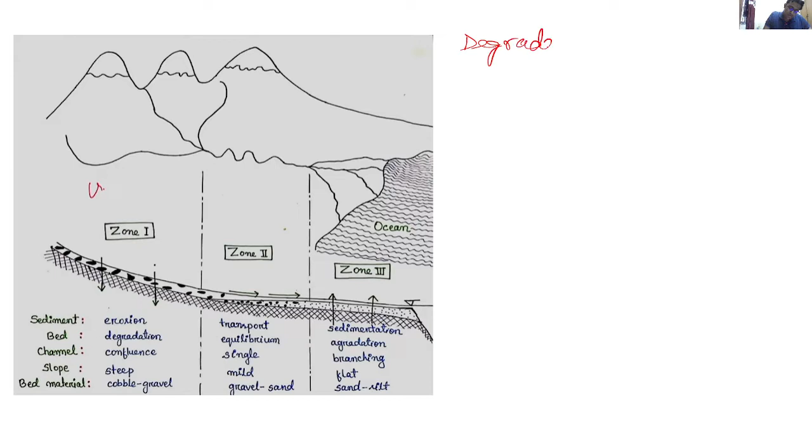One thing very interesting in this part is the geological property of the bed: what is degradation and what is aggradation, and what's the difference between them? I'd like to give a brief overview so I can explain why a river usually forms, and what kind of properties are required for a river to form and flow. These two are basically geological processes, meaning they usually take a lot of time to happen, ranging from thousands to millions of years, though the time frame depends on different rivers around the world.

So I will give a brief difference between aggradation and degradation. After this slide, I will explain why these processes are so important for the formation of a river. Mostly aggradation, as already discussed by Professor Datta in his lecture, relates to increasing the bed level of the river, whereas degradation results in decreasing the bed level.

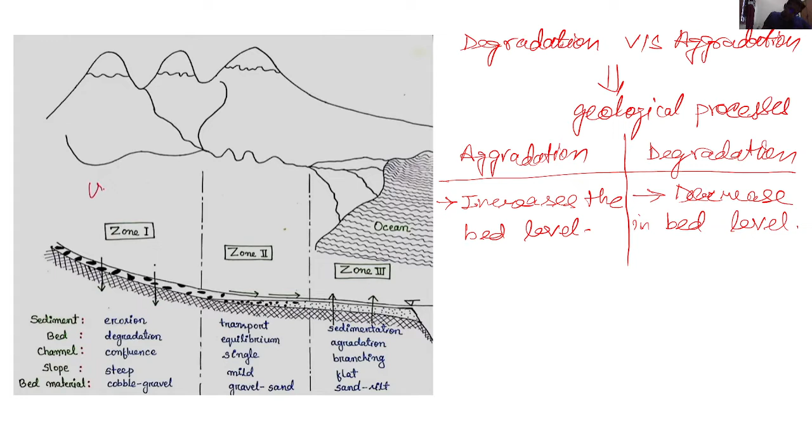Aggradation happens in sediment-rich rivers, whereas degradation happens mostly in sediment-starved rivers.

So aggradation is associated with deposition of sediments, whereas degradation mostly is associated with erosion of the sediments or the erosion of the river bed.

And last but not the least, aggradation is mostly associated with a decrease in kinetic energy, whereas degradation is associated with an increase in kinetic energy. I will take just one more slide to explain it.

So a few things are to be noticed. What is the role of kinetic energy? How does kinetic energy play a part in aggradation or degradation? Basically, as rivers run out of kinetic energy, whenever the stream velocity decreases, they lead to a deposition of sediments.

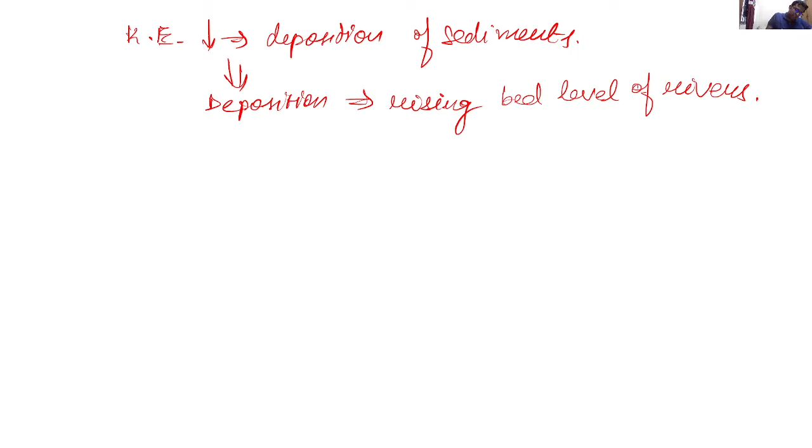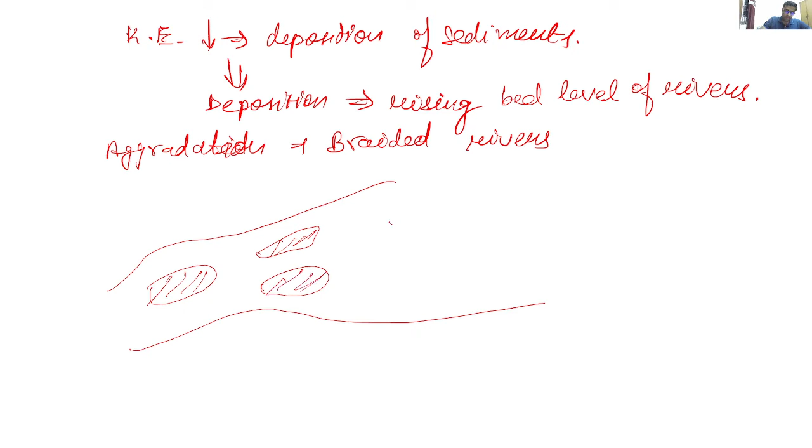So this aggradation is more commonly seen in braided rivers. Braided rivers you might have seen in most of the Indian rivers. When they reach towards the oceans, the braiding increases. The rivers may be very wide, however there may be several sandbars in between.

These are what we call braids, or the braiding of a river. There may be a number of sandbars in rivers as they reach the ocean. The Jamuna River of Bangladesh is a very common example of it.

So in braided rivers, you will see that the stream velocity drastically decreases, and that is why the deposition of sediments also increases, leading to the braided rivers. These are also known as sandbars or braidings—there are several names for it. So it creates a braided appearance for the river.

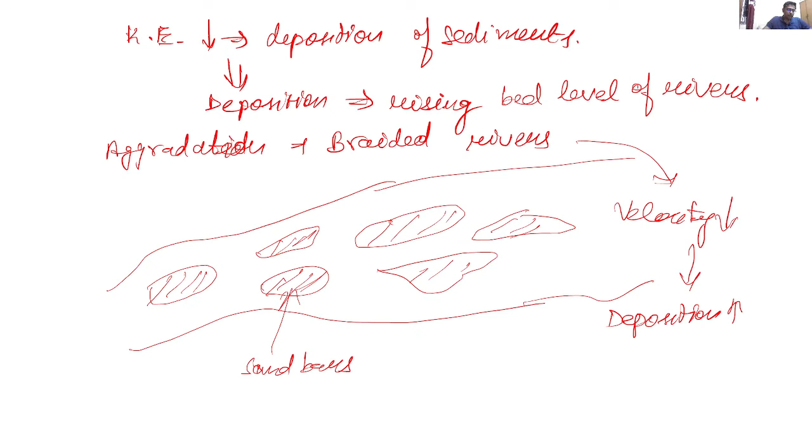There is another reason why braided rivers may be formed: riverine plants, or the plants which are near the fluvial surface, the stream surface. What they do is take root in the river, creating an area resistant to erosion where sediments can build up, creating a bar.

So as the plants or vegetation increase near the banks of the river, their roots may penetrate deep into the banks of the river. This causes more resistance to the flow of the river, resulting in more sediment deposition and a higher number of bars in that area.

On the other hand, the process of degradation is a completely different process. We'll take another slide to explain that.

So degradation happens when the kinetic energy is high, and kinetic energy can be high because of several factors. Some may be due to higher glacier melt in rivers fed by glacier melt, or there may be steepening of the river slope by tectonic uplift.

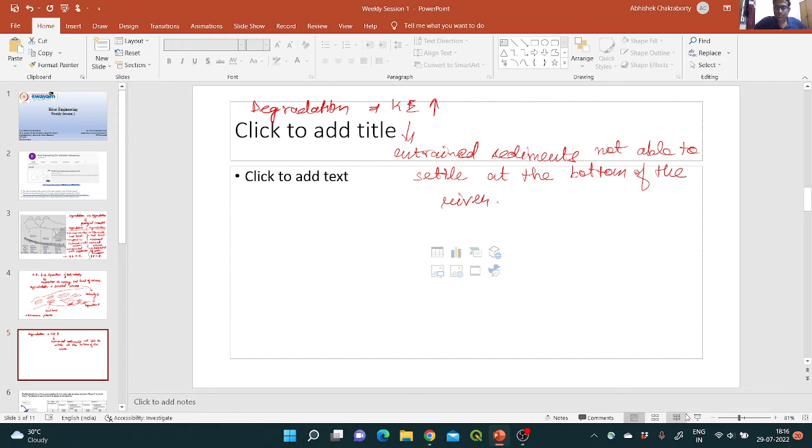There is one doubt there. You all must be having a very simple doubt: why do we need this course of river engineering? Why don't we just merge this course with fluid mechanics, just like the case of open channel hydraulics? Why do we need a separate course, separate study material for this? What's so different about it? We're just doing the same thing as fluid mechanics, isn't it? What do you think about that? Any idea why we need a separate course on river engineering? Please feel free to share your thoughts.

Yes, please proceed. Any idea why do we need a course on river engineering?

Yeah, the riverine hydrology is different when compared to fluid mechanics actually. But can't it be defined by the water transport itself?

No, my view actually is whenever we are designing something over that river, we should know in detail about the hydrological part of that river. That is a very correct view. I will just add that a very different process of sediment transport also occurs in rivers, apart from the water transport. Of course, water transport is also a very prominent feature of river courses, but sediment transport also occurs, and that is why river engineering is such a distinct course.

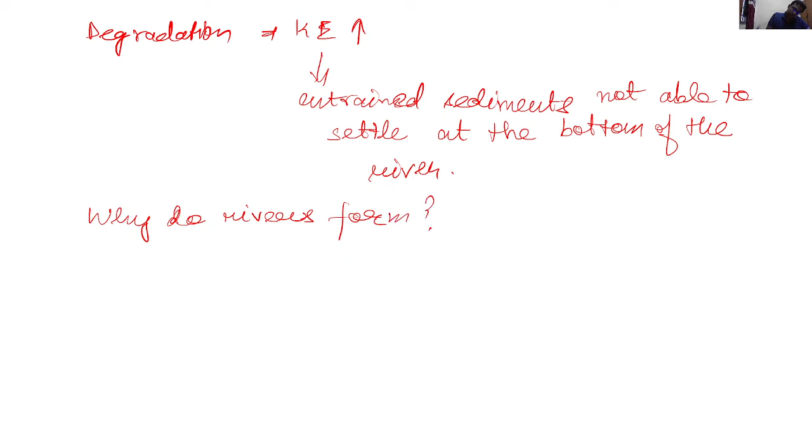Okay, I will explain it using some mathematical formulations now. First of all, why do rivers form? This is a question which may have come in the mind of many people. A very common question. So in terms of rivers, I'm mostly talking about alluvial rivers in this case.

Alluvial rivers are the ones in which the bed and the banks are made up of mobile sediments and soil. So sediments are mostly present in alluvial rivers, and in most of our country the rivers are mostly alluvial in nature, mainly the North Indian alluvial plains. So the major rivers of India are alluvial, present in alluvial plains, defined by a mass transport of sediment in their basins.

Three of the most important rivers which feed the stomachs of billions of people in India happen to be the Indus, Ganga, and Brahmaputra. All of them are actually in the alluvial plains itself. So it becomes very important to know why such rivers actually form, and which is the more dominant process governing the formation of such rivers: is it aggradation or degradation?

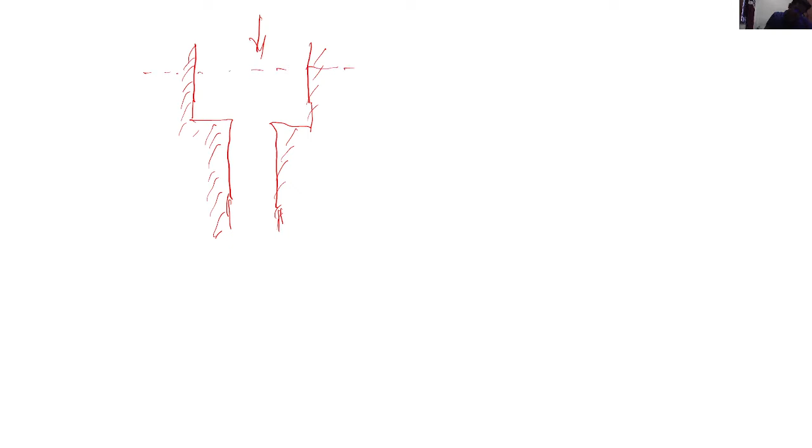So I will take just another slide to start this mathematical formulation. Let us take an example of a confluencing river, meaning the width of the river decreases. Let us assume this is the top width, the top view of a river. It is flowing like this, and there are two sections to the river: Section 1 and the converging Section 2.

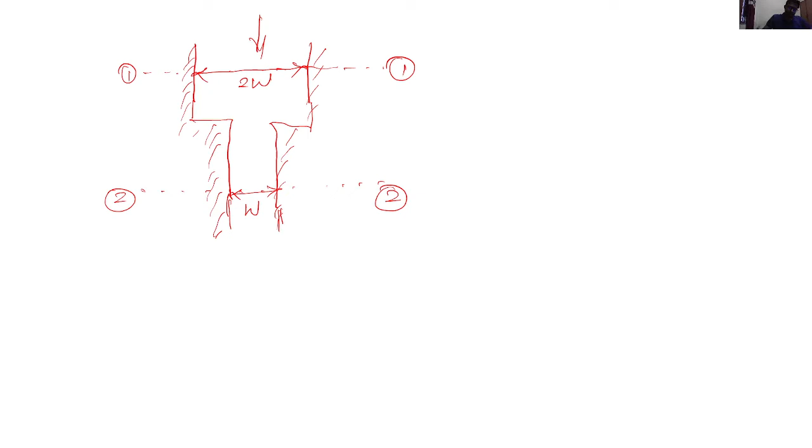Let us assume that in Section 1 the width of the river channel is 2W, and in Section 2 the width of the river channel is W. We are just assuming this to explain why rivers form and which process governs the formation of rivers among aggradation and degradation. I will explain it using this example of a river which converges to half of its width as we move further along it.

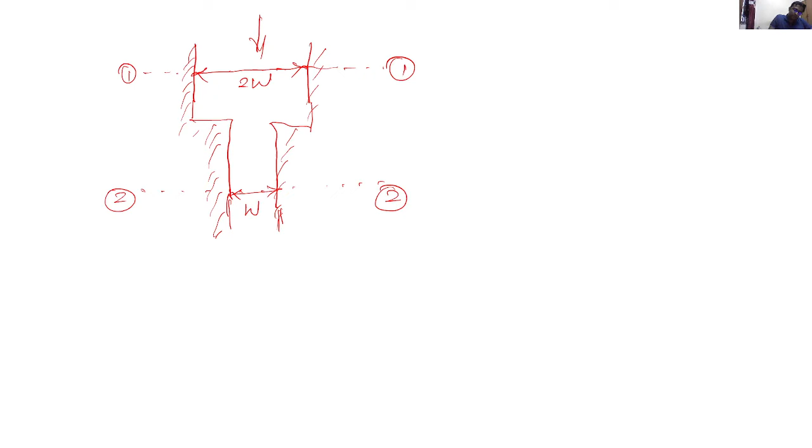So there can be two different components of a river: one is the water component, the other is the sediment component. Both these components are very essential for river hydraulics, and that is why we need to be concerned about both of them. The water component, from the continuity equation, gives us that the discharge Q1 at reach 1 will be equal to the discharge Q2 at reach 2. This is nothing but a fundamental of continuity of mass conservation, so Q1 will be equal to Q2.

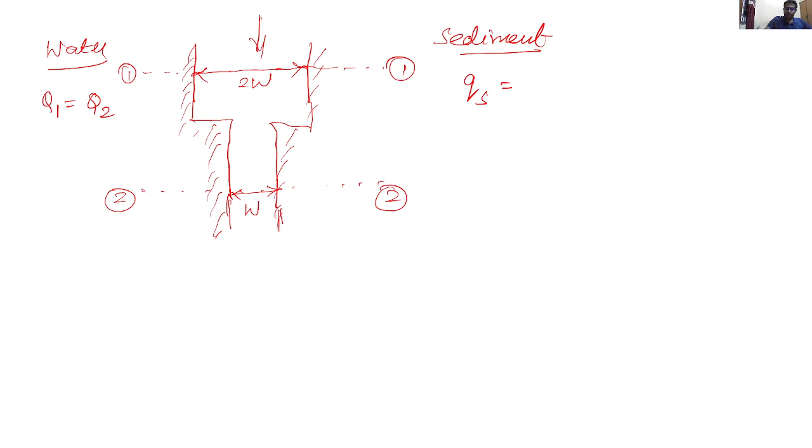And for sediments, we know that sediment discharge may be defined as a function of the stream flow discharge, like A times q to the power b, where small q is nothing but the unit discharge.

So unit discharge is nothing but Q by W, that is the total discharge under the unit width, and qs will be the unit sediment discharge. As I told you, there are two separate processes which govern the flow of rivers. One is the flow of sediments and the other one is the flow of water. So we need to be concerned about both of them. And let us just assume that C is the sediment concentration.

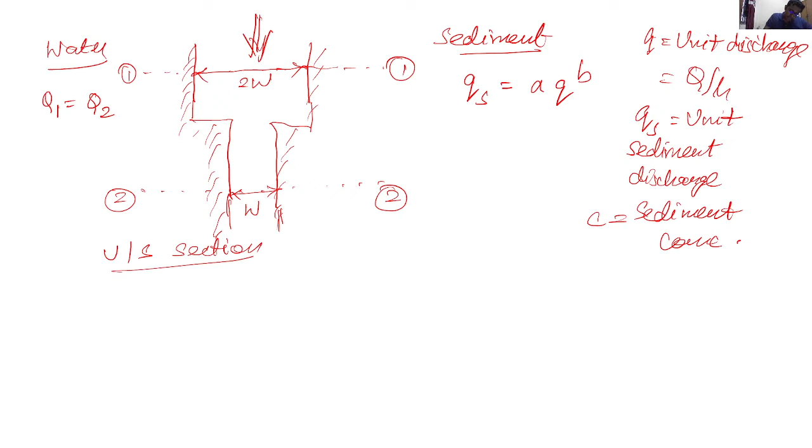So for the upstream section, as the river is moving from the top of the page to the bottom of the page, we can take the upstream section as 1 1. For the upstream section, we can write the total sediment load at 1 1 as equal to the sediment unit discharge, that is QS1 at 1. This subscript determines that it is for reach 1 1, multiplied by the total width of that reach. So the width is 2W for this case.

And as QS is equal to A times Q to the power B, that is, we are trying to write it in terms of water unit discharge, we can write it like this: A times Q1 to the power B times 2W. And let us suppose Q1 is equal to Q. Let us just assume it for the moment. So we can write this expression as 2W A Q to the power B. So this will be the total sediment load at 1 1.

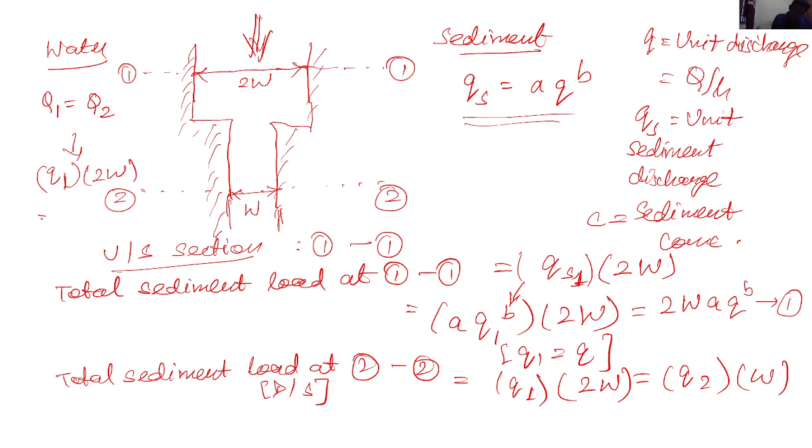Let us again take the total sediment load at 2 2. So that is the downstream section. So this would be again Q1 times 2W or Q2 times W, because we can write Q1 times the width 2W equal to Q2 times the width there, W. So Q1 times 2 is equal to Q2, that is the relation we will find from here. Q2 is equal to 2 times Q1.

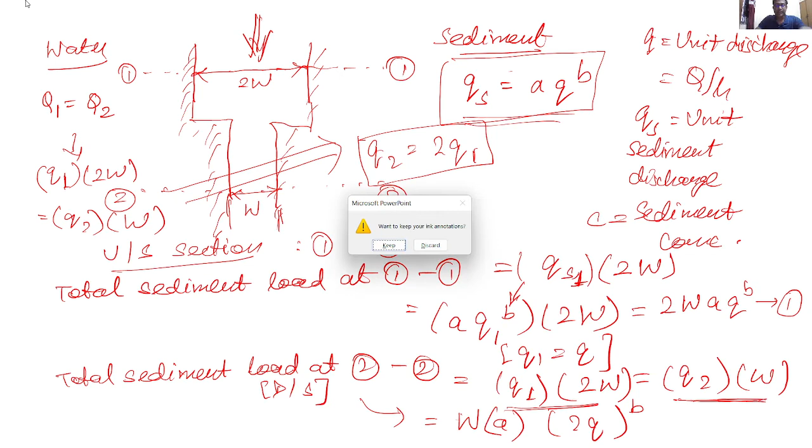So the sediment load at 2 2 will be Q2 times the width there, that is W, or Q1 times the width 2W. So both are same. This can also be written, now in terms of water discharge, as width times the coefficient A times 2Q to the power B, because we took Q1 equal to Q. We'll take another slide to finish this formulation, and I will give a very interesting result out of it.

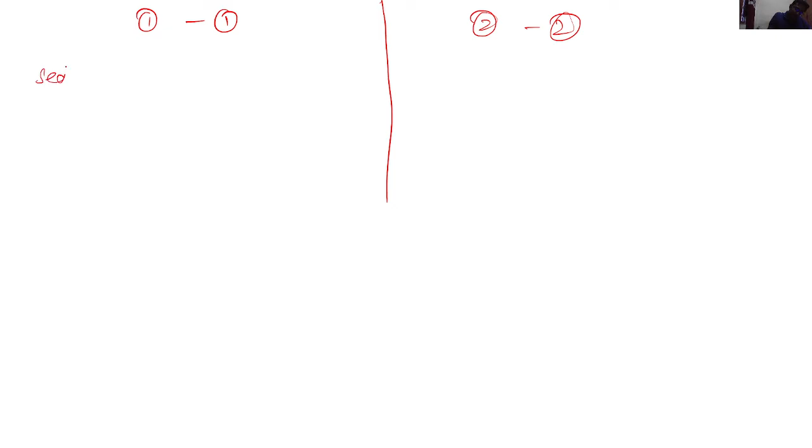So we got finally that at 1 1 and at 2 2 the sediment loads are different. The total sediment load at 1 1 is 2WA times Q to the power B, where W is the width at that position, and at reach 2 2, it would be WA times 2Q to the power B. So we see that these two sediment loads are not equal.

So any idea which quantity would be more among these two? 2WA times Q to the power B or WA times 2Q to the power B. It will depend on the magnitude of B, right? Whatever is the coefficient B value, that will determine which of the left hand side and the right hand side is more. So we can partition the values of B into two different components: if B is less than 1 and if B is greater than 1.

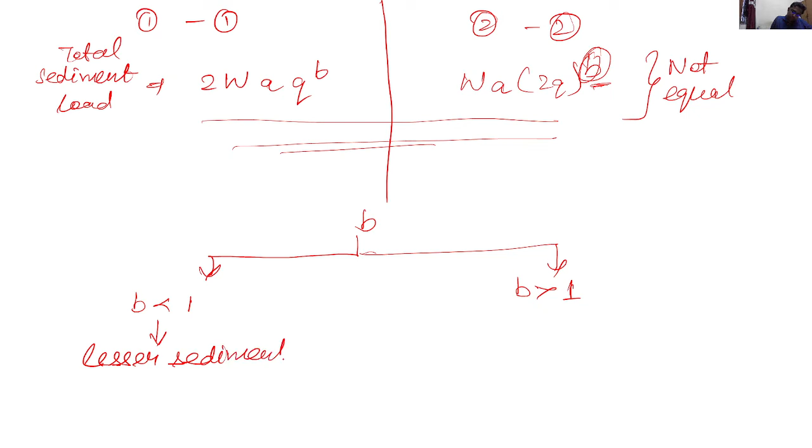If B here is less than 1, what will we get? Which side is more, the left hand side or the right hand side? Yeah, so the left hand side will be more in that case, right? So if B is less than 1, then we will see that there is a lesser sediment transport capacity at 2 2 than 1 1, and vice versa happens when B is greater than 1.

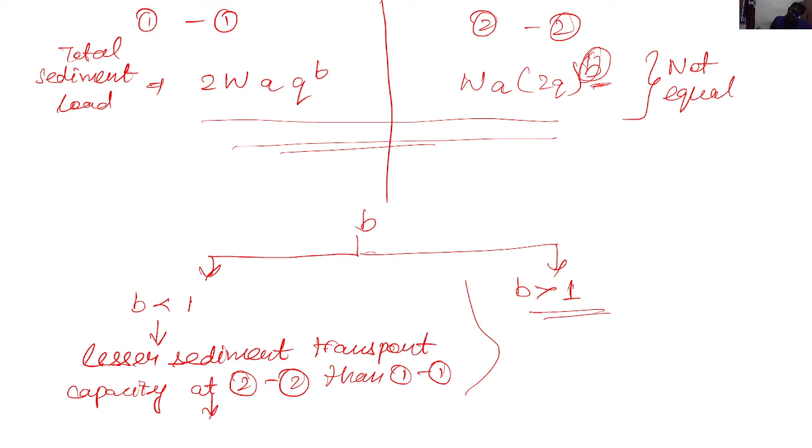So this is effectively the case of channel aggradation, because it's decreasing, and this is the case of channel degradation. So just to summarize this thing in very simple terms, I will take one final slide. Without any mathematical formulation, I will explain finally.

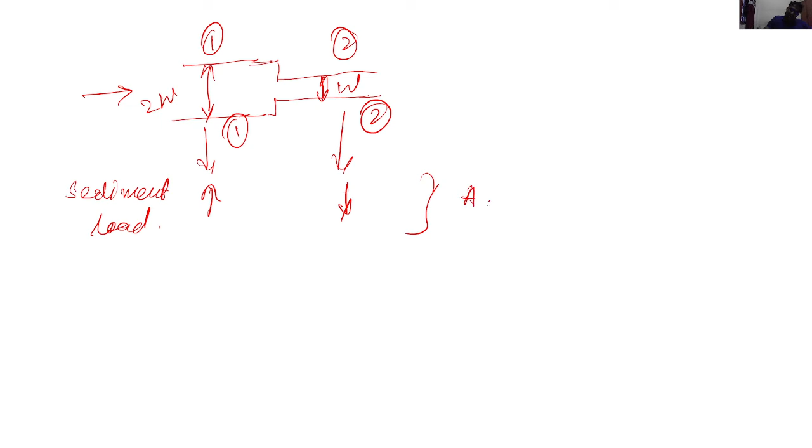So as we move to a converging river, that is, as the width decreases, if the sediment load at the right hand side, in the second reach 2 2, is less than that of the left hand side, then aggradation has happened, because this means that a lot of sediment has already deposited somewhere in between, and that is why the sediment load has become much lesser as we move from reach 1 1 to reach 2 2.

And if the opposite happens, if the sediment load is more here, if the signs reverse, then it would be degradation. That means that more sediment has crossed on and reached reach 2 2. Why? Because a lot of erosion may have occurred in between. So that is the basic funda behind whatever I'm trying to explain so far.

So this was the first thing. Now, I will just come back to the previous question. Why do rivers form? What is so necessary for the formation of rivers? So the thing is that for a river to form, flow convergence, just like the case I showed here, this was the case of converging flow. So for a river to form, flow convergence must be preferable to flow divergence.

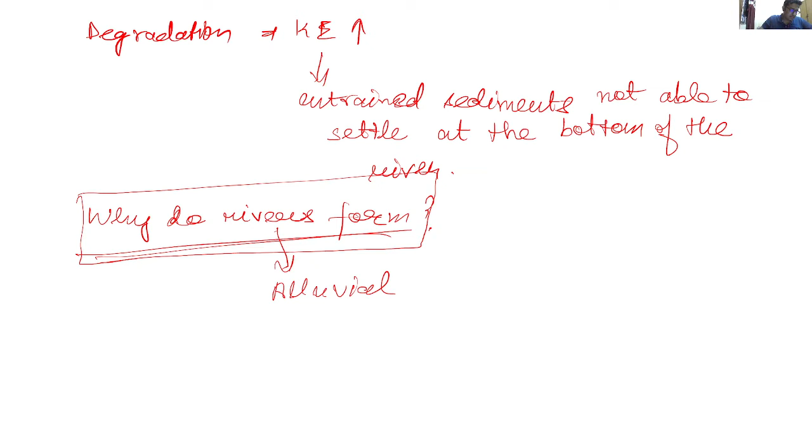Why? Because then aggradation will not happen most of the time, because from experimental evidence it has also been found that B is mostly greater than 1 for a sediment discharge relationship. So when we sum it up, flow convergence must be preferable to flow divergence for rivers. If flow convergence would result in aggradation, then the sedimentation process would force the water away from the point of convergence and rivers would never form. So rivers can therefore only form when flow convergence results in degradation. That is why degradation is such an important process for flow in a river to be possible.

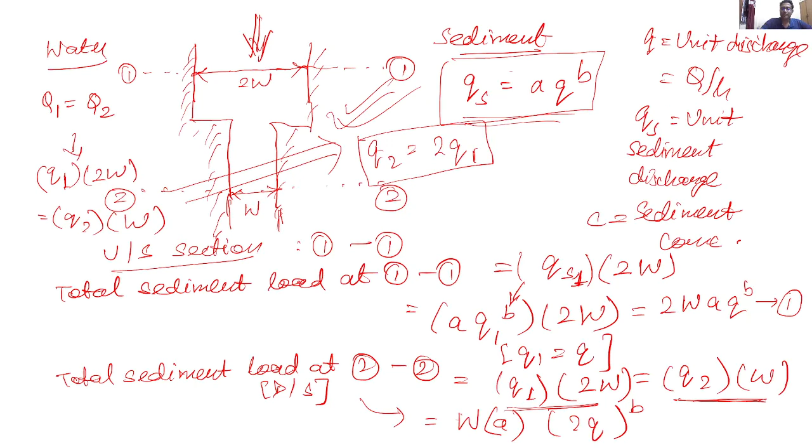I hope I am clear so far. If you have any doubt, please feel free to stop me in between, because after this I am going to start the numericals, which will not require the concepts from here, but still I wanted to give you this idea. Is there any question? Okay, I guess you don't have any doubt.

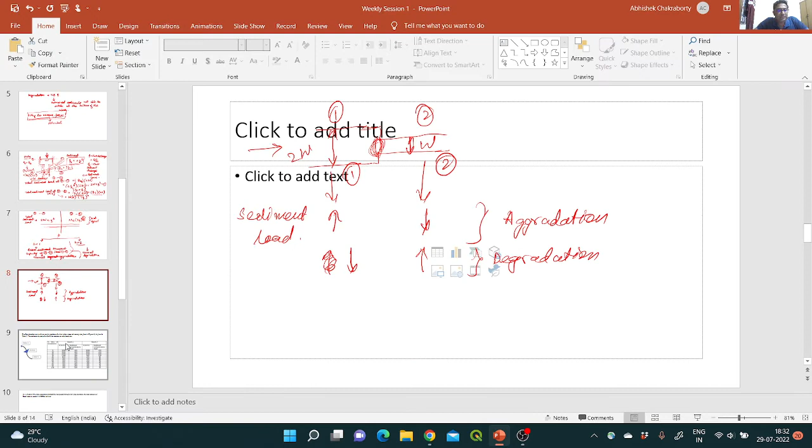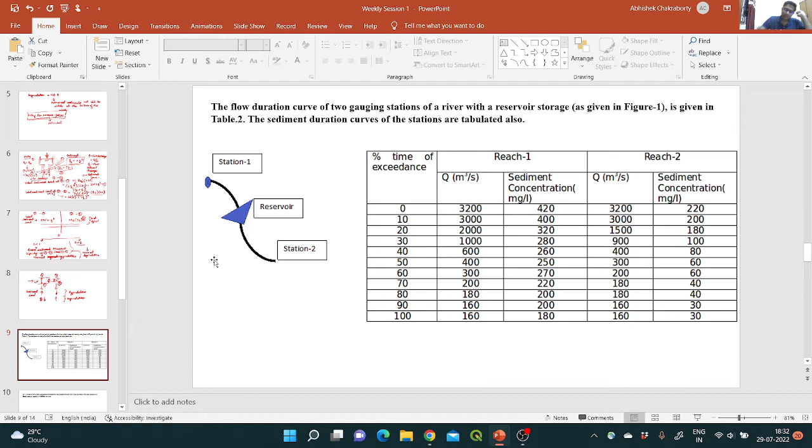So let us take a set of questions as we proceed into the lecture. This question is very similar to the last few questions in your assignment 1 of this course. The flow duration curve of two gauging stations of a river with a reservoir storage as given in figure 1 is given in table 2. So this is table 2 and this is figure 1. The sediment duration curves of the stations are also tabulated below. Okay. So what are the questions?

A flood of 5% time exceedance probability has passed through for an 8-day duration. The total amount of flood water at reach 1 in million cubic meters is? So we are asked about Q at 5% exceedance probability. Going back to the question, we can see the percentage time of exceedance plot. It is given for 0% and for 10%, but 5% is not given. So we can take a simple arithmetic mean to find Q at 5% time of exceedance. It is not something recommendable, but we can still do it because of lack of data in this question.

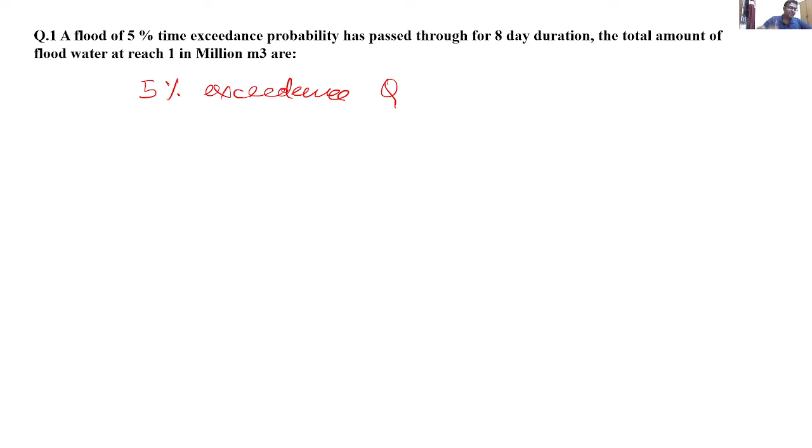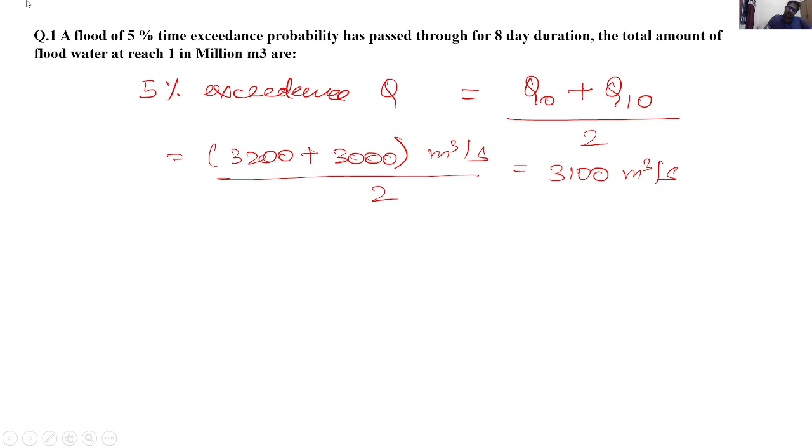So let us take it as Q corresponding to 0% exceedance plus Q corresponding to 10% exceedance divided by 2, the arithmetic mean of the two. That is 3200 plus 3000 cubic meters per second divided by 2, which comes out to exactly 3100 cubic meters per second. The question wants the total amount of flood water for an 8-day duration, so we want to convert this 3100 cubic meters per second into million cubic meters. We just multiply the discharge with the time to get the final volume. It's as simple as that.

So the procedure would be 3100 cubic meters per second times 8 days. However, the units are not consistent: on one side there is seconds, on the other there is days. We have to convert it into cubic meters and then into million cubic meters, which is 10 to the power 6 cubic meters. So this is 3100 times, converting days into seconds, 8 times 24 hours times 60 minutes times 60 seconds. Now we have it in cubic meters, and we divide by 10 to the power 6 to convert to million cubic meters. So the final answer will be 2142.72 million cubic meters.

So that's the answer to the first problem which I have discussed here. The second problem is that a flood of 5% time exceedance probability has passed through for 8-day duration. The total amount of sediment load at reach 1 and reach 2 in kg is? Okay, it's a very interesting question, but it's for the sediments and not the discharges.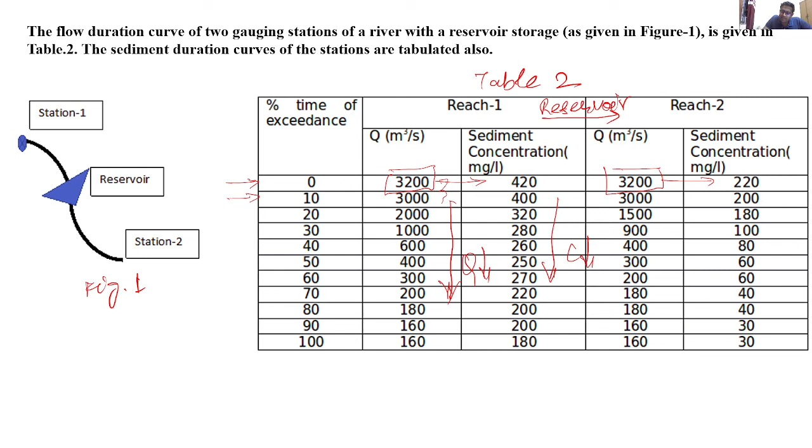So let us just take the sediment concentrations with respect to the same discharge. Let us say we take the 3200 meter cube per second discharge for reach 1 as well as for reach 2. So we can see that the corresponding sediment concentrations have decreased a lot for reach 2 than that of reach 1. Why? Because a lot of sediment may have already been trapped by the reservoir. So the sediment concentration at reach 2 is almost half that of the one at reach 1 for 3200 meter cube per second.

Now let's just take another concept. What happens due to the interplay of the discharge, the sediment concentration and the reservoir presence? I will explain it using a lower discharge quantity. Let us say we are taking a lower discharge of 160 meter cube per second for reach 1 and reach 2. We can see that the sediment concentration has decreased a lot from reach 1 to reach 2. It is basically a 6 times decrease for the reach 2 sediment concentration than that of reach 1.

So the inference is that as the discharge decreases, more of the sediment will tend to deposit in the riverbed, and that is why the sediment concentration will also decrease, and the presence of the reservoir will decrease the sediment concentration even further. So these three inferences I wanted to first discuss through these tables. I have done that. Let's now move back to the question. A flood of 5% time exceedance probability has passed through the 8-day duration. The total amount of sediment load at reach 1 and reach 2 in kilograms is.

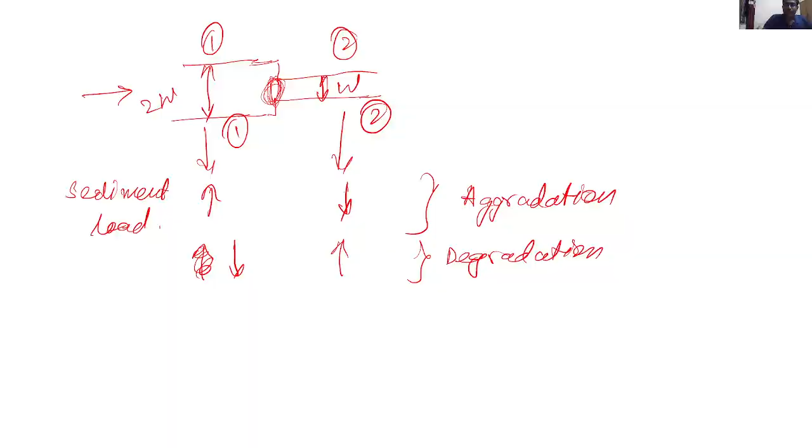Okay, so we need a 5 percentage. Basically, the funda behind this question is that we need to multiply the water discharge times the sediment concentration to get the final load in kilograms. So first of all, we need to find out the 5 percentage time exceedance probability discharge for reach 1 and reach 2. Let's go back to the table. For reach 1, it will be found out by the arithmetic average of 3200 and 3000, and for reach 2 also the same. The discharges have not changed because of conservation of water mass.

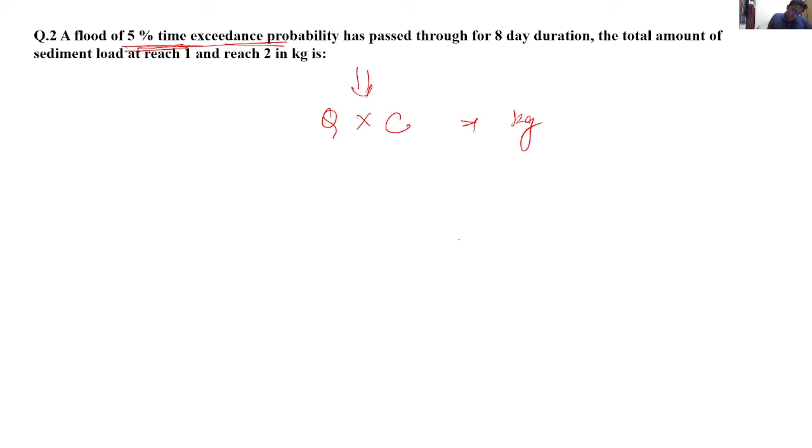So Q reach 1 at 5 percentage exceedance can be written as the arithmetic average for 0 percentage exceedance and 10% exceedance. This is not preferable, but due to lack of data, we need to take the arithmetic mean only. So this would be 3100 meter cube per second. In a similar way, we can also find out the concentration at reach 1 at 5 percentage exceedance by taking the arithmetic average. So we need to take the arithmetic average of 420 and 400 for reach 1, and 220 and 200 for reach 2.

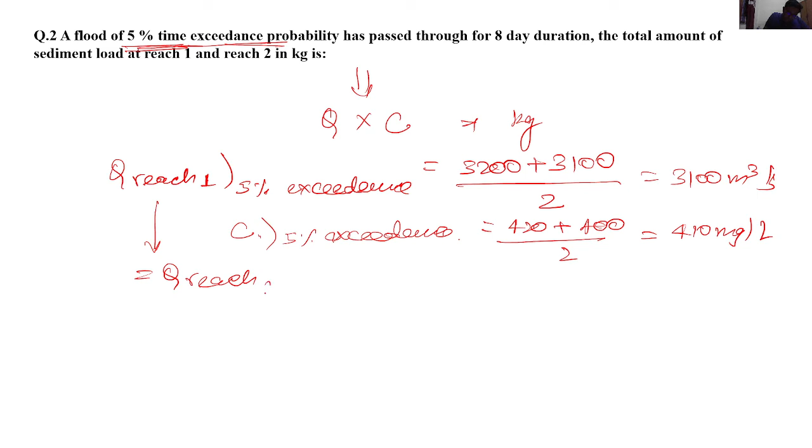So this would be 420 plus 400 by 2, that is 410 milligram per liter for reach 1. So Q reach 2 is equal to Q reach 1 also, because of water conservation, the mass conservation. But the sediment concentrations will be found out by the arithmetic mean for the 0 percentage exceedance and the 10 percentage exceedance discharges. So this would be 220 plus 200 by 2 equal to 210 milligram per liter.

So now we want to find the total amount of sediment load at reach 1 and reach 2. So let's find it out. It's very simple. So for reach 1, as I told you already, it will be a multiplication of the discharges. First of all, we need to convert the discharge into volume by just multiplying the time duration. So this would be 3100 meter cube per second into 8 day, 24 hours, 60 minutes, 60 seconds.

So we have converted it into meter cube, and again convert this 410 milligram per liter into kg per meter cube. So 410 into 10 power minus 3 will make it into gram, into 10 power minus 3 will make it into kilogram. So this would be kilogram per 1 liter, and 1 liter is equal to 10 power minus 3 meter cube. So at reach 1, the sediment load will be 8785.152 into 10 power 5 kg. So it's a big number actually. We'll take just one slide more to explain the rest of the question.

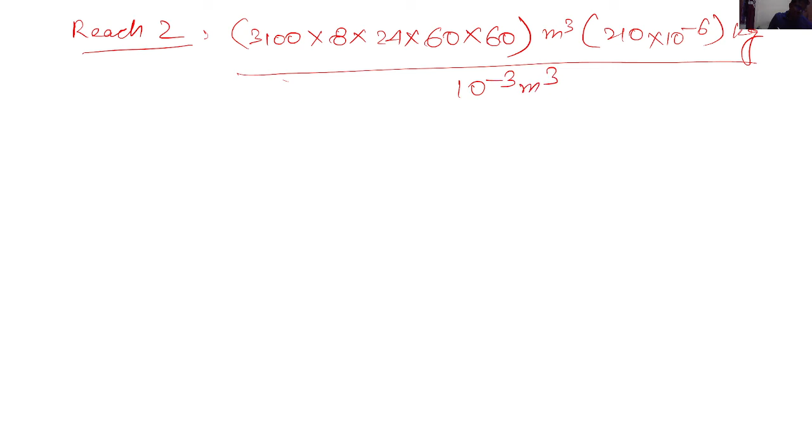Let us just talk about the reach 2 now. Reach 2 again, we know the discharge already, we know the sediment concentration already, so it's pretty straightforward. 3100 meter cube per second into 8 day, convert into hours, minutes, seconds, meter cube, times 210 milligram per liter. So just multiply it straight away by 10 power minus 6 to convert into kg, and we need to convert the per liter into per meter cube, so 10 power minus 3 meter cube. So this happens to be 4499.712 into 10 power 5 kilogram.

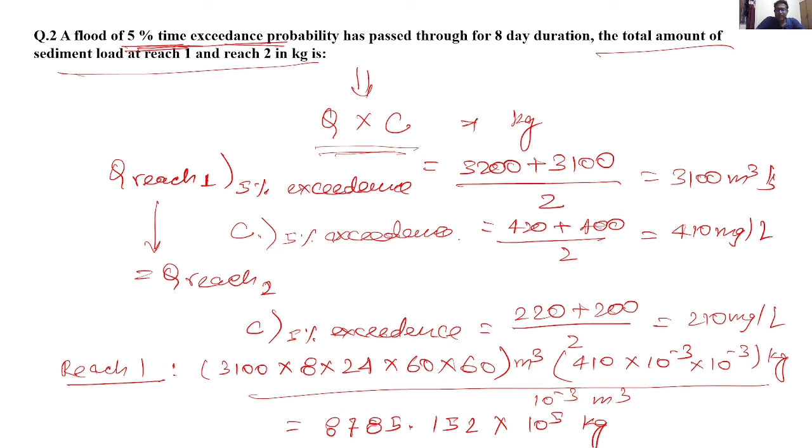So you can observe that the sediment load at reach 1 is 8785.152 into 10 power 5 kg, and at reach 2 is 4499.712 into 10 power 5 kg. So the sediment load at reach 2 is almost half that of reach 1. And why has that happened? Because most of the sediment may have already got trapped in the reservoir.

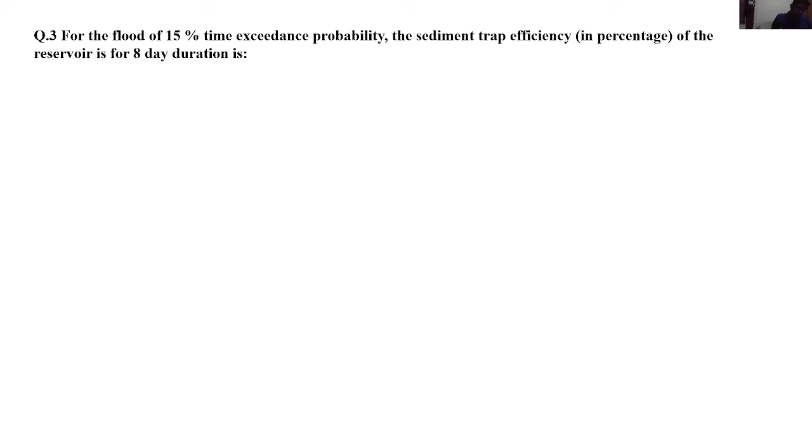Okay, so let's move to the next question. For the flood of 15 percentage time exceedance probability, the sediment trap efficiency in percentage of the reservoir for 8 day duration is. So this question is basically two steps. Number one, we want total sediment load at reach 1 and reach 2 both, and finally we will calculate the sediment trap efficiency in percentage.

So sediment trap efficiency in percentage will be nothing but total sediment load at reach 1 minus total sediment load at reach 2, by total sediment load at reach 1, into 100 percentage, just to convert it into percentage. You have to report it in percentage, not ratio, because the question requires that. So that is the thing.

So let's just see. So what will be the total sediment load at reach 1? We will find it using the very similar technique which we used in the previous question. So corresponding to 15 percentage time exceedance probability, and 15 percentage I believe is not given, so it will be taken as the arithmetic mean of the discharges corresponding to 10 and 20 percentage time of exceedance. So we will do the same.

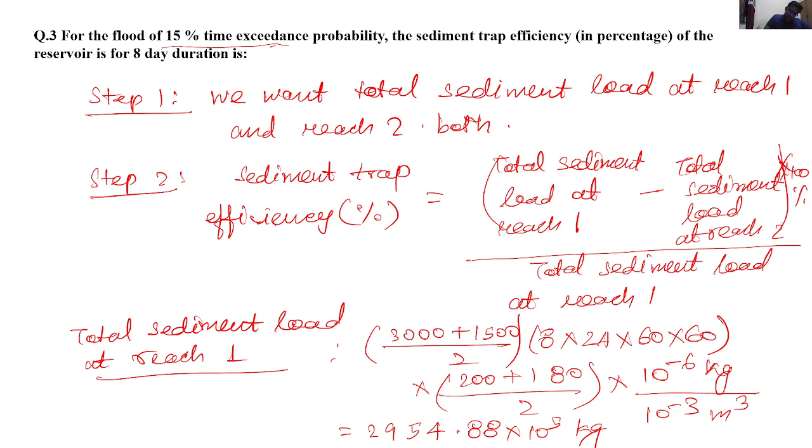So we have to convert it into kg. So multiply by 10 power minus 6, and liters you have to convert into meter cube, so divide by 10 power minus 3. So it happens to be 2954.88 into 10 power 5 kg. I will take another slide to finish this. Yeah. So at reach 2, we have already found out what is the sediment load. We need to find out the sediment load at reach 1.

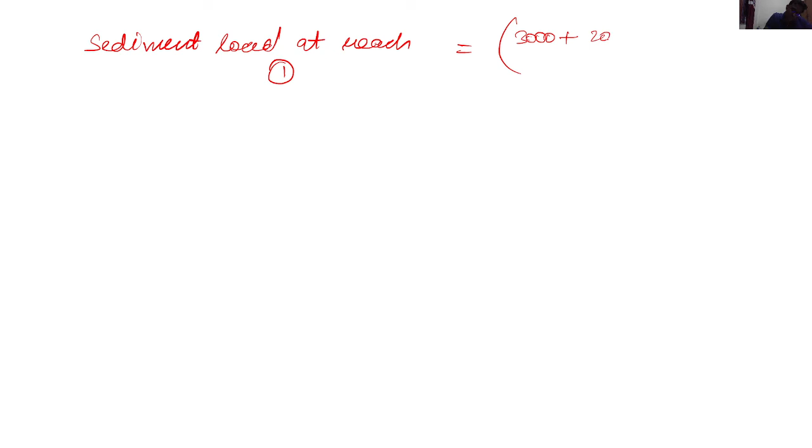Load at reach 1 is equal to 3000 plus 2000 by 2, that is the arithmetic average of the discharges. Convert the 8 days into seconds, then take the arithmetic mean of the corresponding 10% exceedance and 20% exceedance sediment concentrations, that is 400 milligram per liter and 320 milligram per liter. Convert it into kg, 10 power minus 6 kg by 10 power minus 3 meter cube. So the answer would be 8709.12 into 10 power 5 kg.

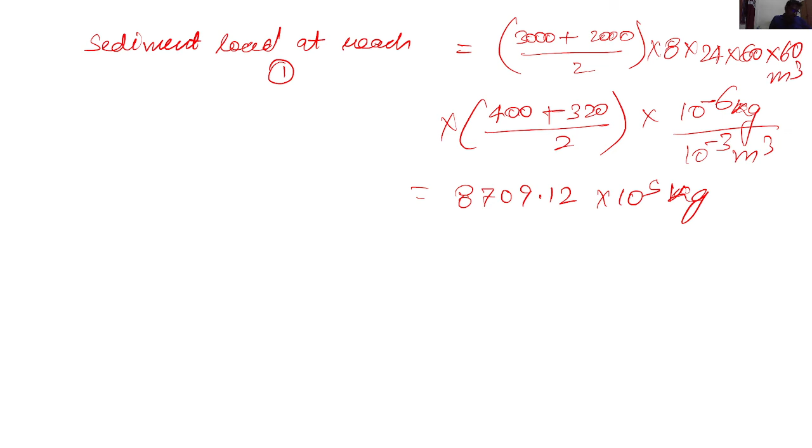So the sediment trap efficiency finally will be sediment load at 1, 8709.12 into 10 power 5, minus sediment load at 2, that is 2954.88 into 10 power 5, by sediment load at 1, 8709.12 into 10 power 5, into 100, just to convert into percentage, and that would come out to be 66.07 percentage. This means that almost two-thirds of the total sediment has been trapped by the reservoir. So the reservoir plays a huge role in trapping the sediments.

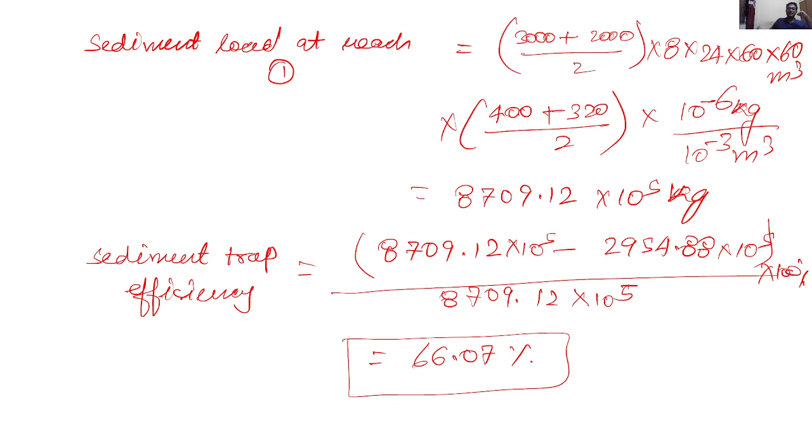So let's move into the next question. For a year of 365 days, the annual water storage in million meters cube of the reservoir is. So this is a very interesting question. But one thing to be noted is that the discharge value is not given. So how would you convert the discharge into units of volume, that is million meters cube? So let us just see what happens. In the original table we have been given the percentage time of exceedance and the discharges corresponding to that, but the discharge for the annual period is not given straight away. So what will you do?

So usually the discharge is taken corresponding to a higher time of exceedance, because for most of the years the discharge is not at the extremes. So it will definitely not be at 0% time of exceedance, 10%, 20% or 30% time of exceedance. So we can just assume the discharge to be corresponding to, let us say, 70% or 80% time of exceedance. These higher discharge values will only occur under certain flooding periods. However, that is definitely not the annual average discharge.

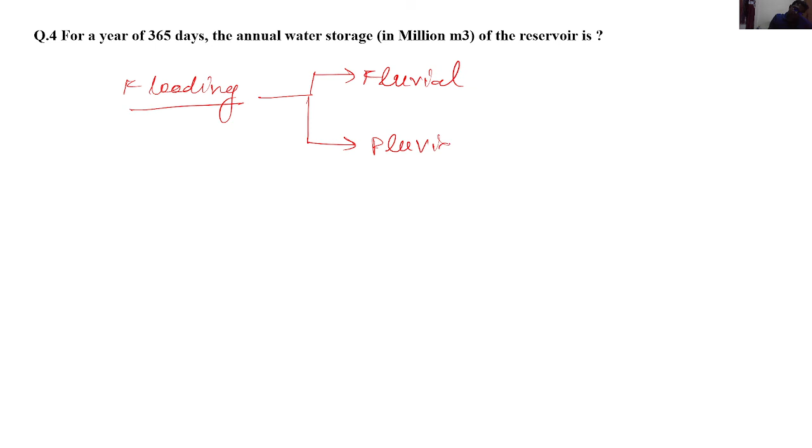So when you compare the different types of flooding in Indian rivers, you will find three different types: fluvial, pluvial, and ocean-based coastal flooding. So I will just give a brief about that. Flooding can be either fluvial or pluvial or coastal flood. In fluvial flooding, it can occur because of tidal backwater and some upstream discharges. There has been observed a higher melting of the glaciers from which the water comes to the system, and that is why the fluvial systems have become submerged in water. So fluvial flooding happens because of that.

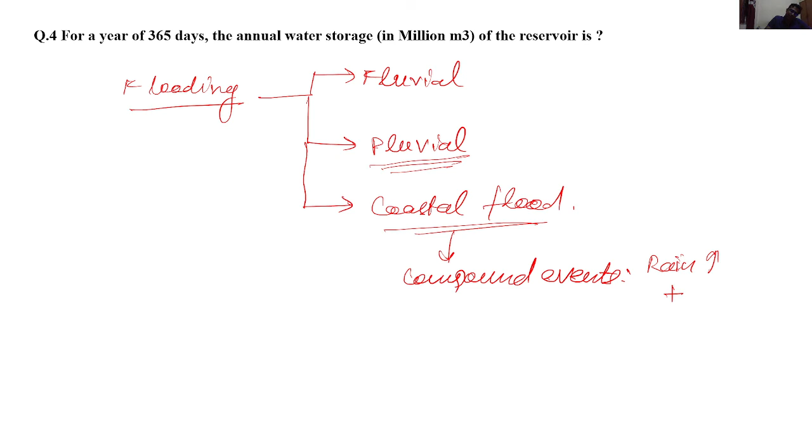Pluvial flooding can occur because of heavy local precipitation, or in technical terms, extreme rainfall events. The ground cannot absorb the rainfall effectively, and that is why this kind of flooding occurs. Pluvial flooding can also occur for urban drainage systems when they are overloaded by excessive water flow. And coastal flood can occur because of inundation of the land areas along the coast by seawater. It can be caused by compound events, which means when two extreme events happen together, like higher rainfall and high tides. If they both happen together for, let us say, a 6 hour or 8 hour period, then coastal flooding will occur. So these are the three kinds of flooding.

Mainly the North Indian rivers are fed by glacier melting, and they are perennial in nature. However, the peninsular rivers, when we exclude the Western Ghats, would be mostly not perennial, and during the summers the discharges decline a lot. I am excluding the Western Ghats because they happen to be some of the most rain-fed regions of our country. So when we compare a peninsular river with a North Indian river, the frequency, which is nothing but the number of times this happens, of the discharge will vary a lot.

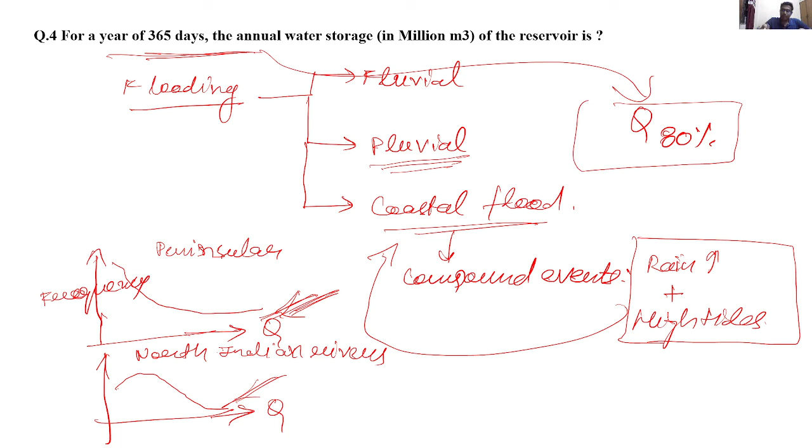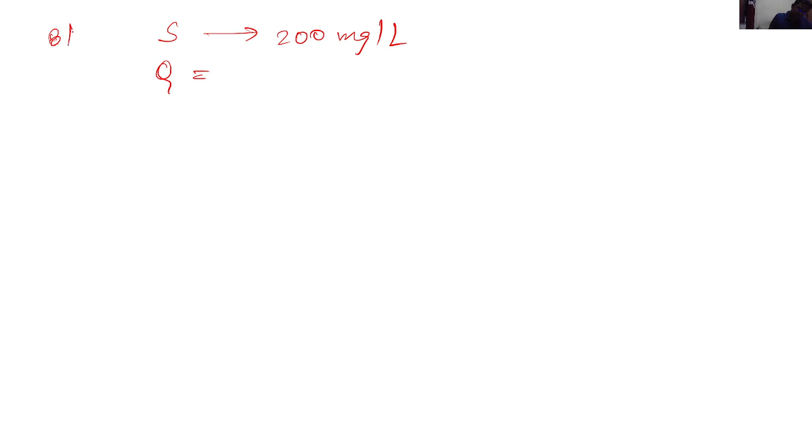So we take the 80 percentage value, and the sediment concentration with respect to 80 percentage will be 200 milligram per liter, and the discharge with respect to 80 percentage exceedance is 180 meter cube per second. You will find it from the table also.

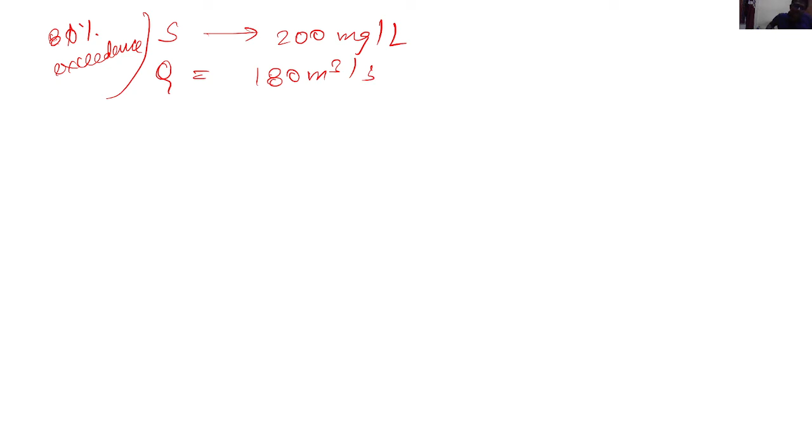The question requires the annual water storage of the reservoir in million meters cube. Just multiply the discharge by the time, that is 365 days, multiply it into hours, the hours into minutes, and the minutes into seconds. So we get meter cube from it, and just divide by 10 power 6 to get the million meter cube quantity. So that would be 5676.48 million meter cube, the annual water storage of the reservoir.

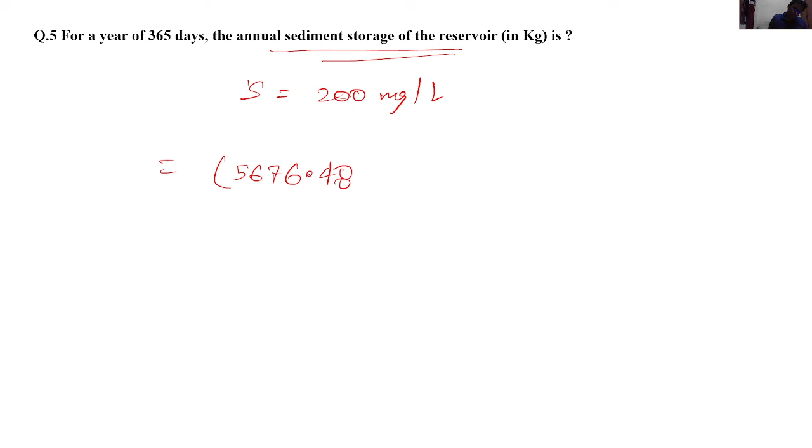Next, let's proceed to the next question. For a year of 365 days, find the annual sediment storage of the reservoir. This is again very similar. We already found the sediment concentration, that was 200 milligram per liter, corresponding to 80 percentage exceedance. Just multiply this volume by the sediment concentration. So we get the final answer to be 5676.48 into 10 power 6 meter cube as the volume, multiplied with the concentration.

200 milligram will be converted into kilogram by multiplying it by 10 power minus 6, and the liter will be converted into meter cube by multiplying by 10 divided by 10 power minus 3. So the final answer will be 11352.80 into 10 power 5 kg. This is the final sediment load, the annual sediment storage of the reservoir in kg.

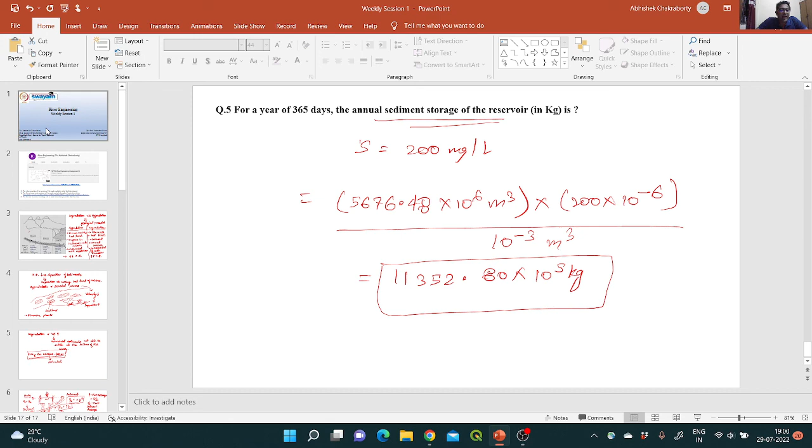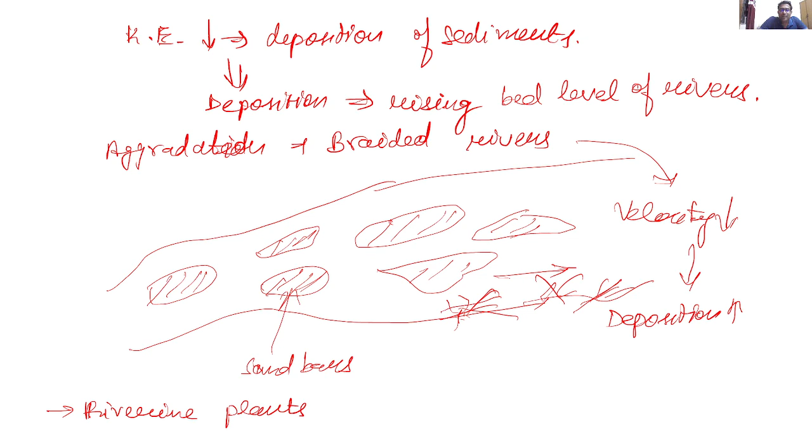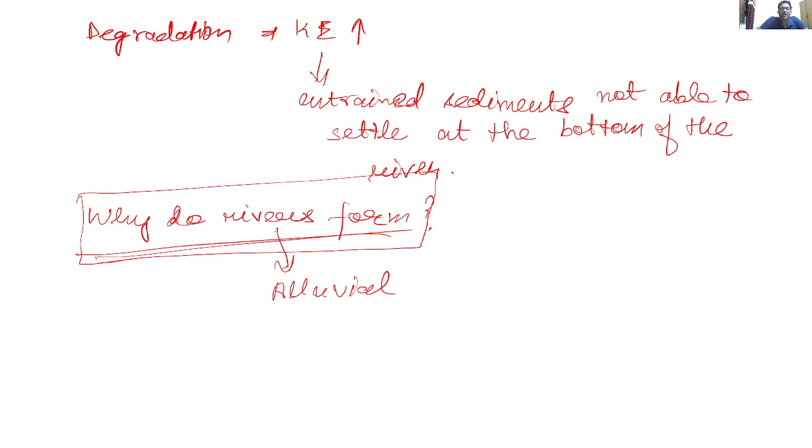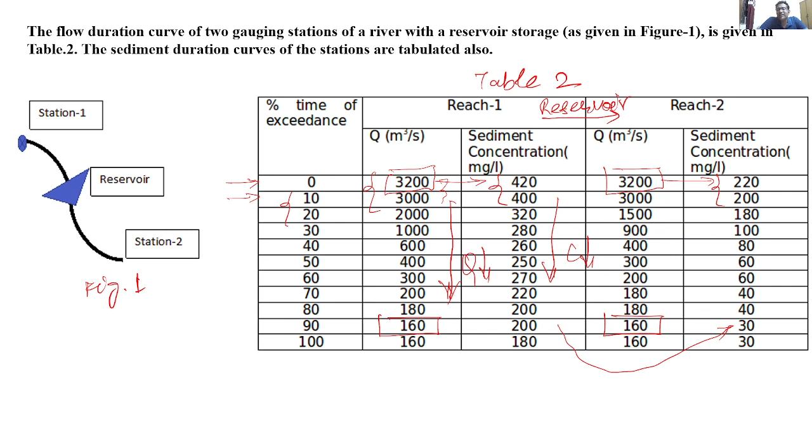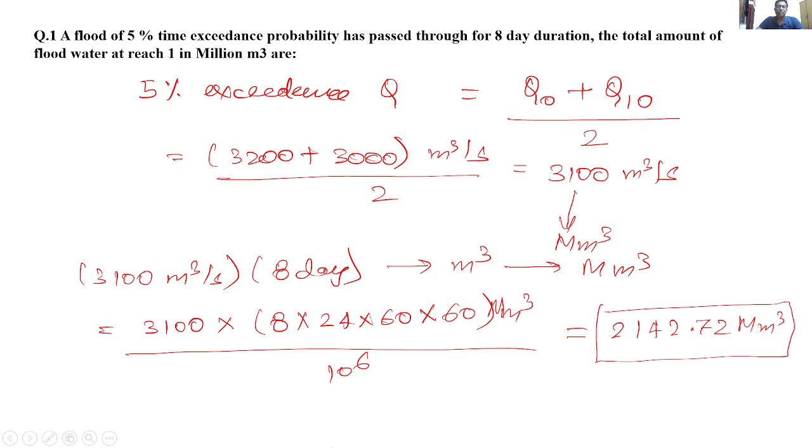If you have any question, please feel free to ask me. Is there any question? No, sir, for me it's very clear.

The last few questions which I solved, through them you can also solve the last few questions of assignment one. Assignment one should be very easy after this, questions 11 to 17. That should be very easy, I just changed the numbers. So you can just play with the numbers and find the final values.

Just a brief note about the assignment. I believe in the last question about sediment properties, question number 7 or 9 something, there are four options given. The answer you get may not completely match the options, so just take the option nearest to your answer. Take G, the acceleration due to gravity, as 9.81 meter per second square in your analysis, not 10. If none of the options match, just tick the option nearest to your answer, and you will get the correct answer.